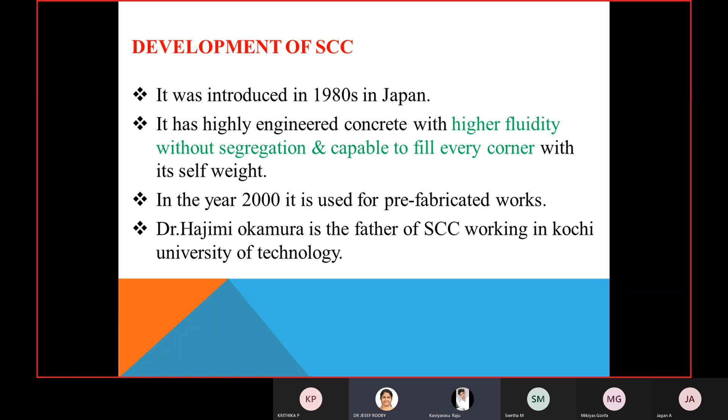Abstract: Self-compacting concrete is a fluid mixture suitable for placing in structures with congested reinforcement without vibration. There is no vibration needed for this concrete, and it has the ability to fill every corner. Self-compacting concrete development must ensure a good balance between deformability and stability.

Introduction: it flows under its own weight and does not require any external vibration for compaction. For normal concrete, we have to compact it or use vibration to settle it down, and this is an advantage for self-compacting concrete - no need to use vibration or compacting material.

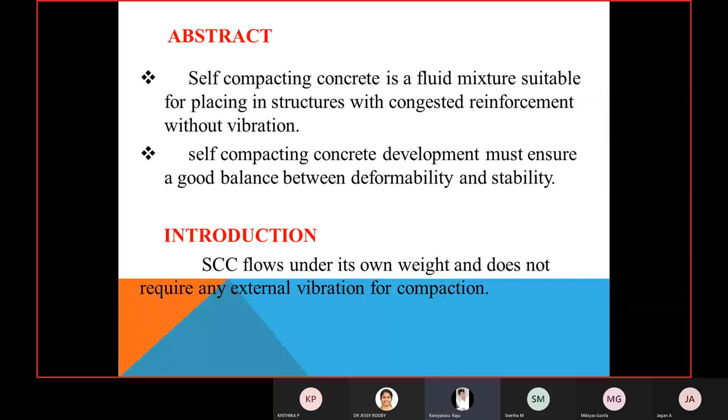What are the materials used? Normally, cement - ordinary Portland cement, grade 43 - was used, along with fly ash. In India, it was obtained from Haryana power plant station. Admixtures used were polycarboxylate ether based superplasticizers complying with ASTM C494 type. These are all the materials used.

Physical properties of cement: the physical properties, results, and IS standard code specification. Fineness, normal consistency, initial setting time, and final setting time were calculated. Compressive strength for 3 days, 7 days, and 28 days was also calculated.

Then properties for fly ash: it is grayish in color and has a specific gravity of 2.13. The average compressive strength after 28 days of mixture is 4.90 megapascal.

Then chemical properties of fly ash: loss of ignition, silica, iron oxide, aluminum, calcium oxide, magnesium oxide, total sulfur, insoluble residue, sodium oxide, potassium oxide. These are the calculations, shown as percent by weight.

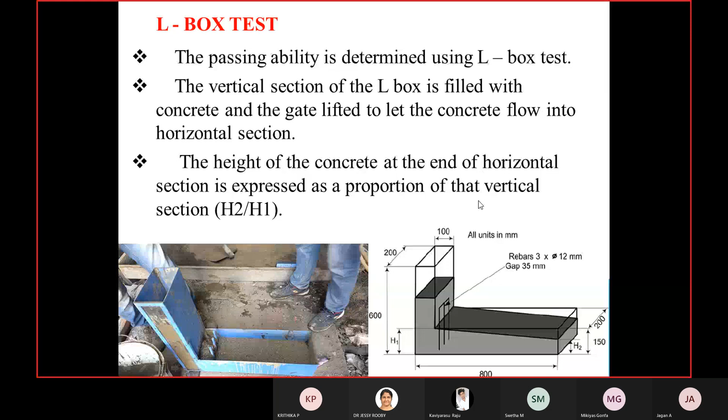Test procedures. Then the L box test. The passing ability is determined by using the L box test. The vertical section of the L box is filled with concrete and the gate lifted to let the concrete flow into the horizontal section. The height of the concrete at the end of the horizontal section is expressed as a proportion of the vertical section, H2 by H1. This is the test procedure.

Workability and compressive strength require more than 5 trial batches. They take 9 trial batches; it requires 9 trial batches. Slump flow, and the time taken for concrete to reach the 500 mm spread circle, and the V funnel and L box tests. How many megapascals for 7 days, 28 days, and 90 days strength attained will be calculated.

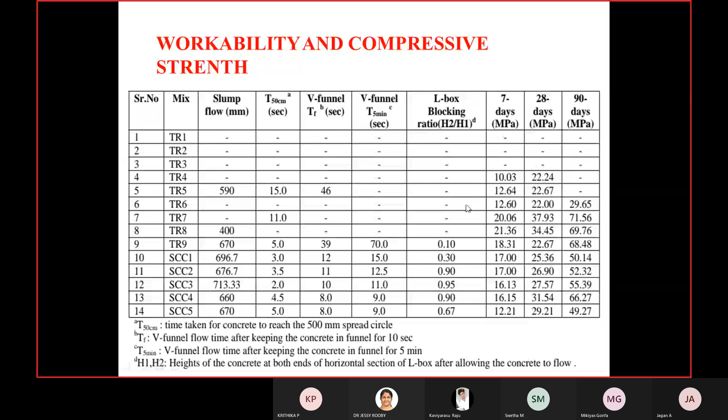Advantages: it is faster construction, improved workability and productivity, freedom in design, cost reduced due to less equipment, reduced noise pollution since vibrators are not used. Typically higher early strength of the concrete is achieved so that formwork removal can be performed more quickly, and reduced construction times, especially for large construction projects.

Disadvantages too: it requires more trial batches, not 1 or 2. It requires more than 5 trial batches. It is costlier than conventional concrete based on materials. There is also a lack of globally accepted standard and mix design.

Conclusion: self-compacting concrete technology can solve time and cost issues, and enhance quality and durability. Since the concrete is capable of self-consolidating and self-compacting, it can easily reach difficult areas and spaces in molds. This factor ultimately yields defect-free, better quality concrete structures.

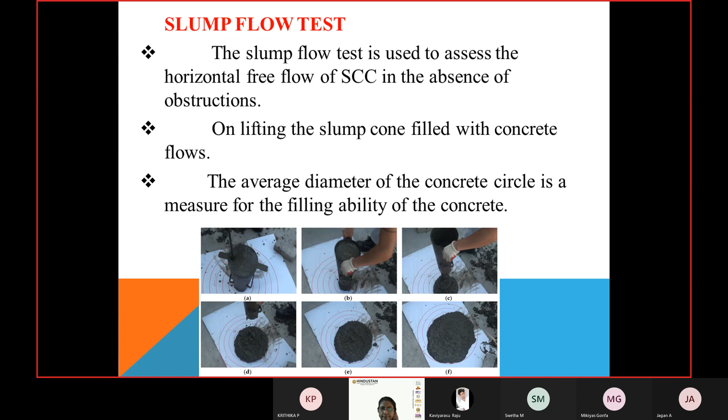Okay, then just move on to that. All these tests, your V funnel, L box, what is the purpose of this test? To calculate how much time it takes. If it reaches more than 6 seconds, it is not recommended to qualify, because it has to fill every corner within the required time.

Is there any standard code for SCC? Standard code, yes ma'am. Which code? One second. IS 383-1970 is the code for fine aggregate and coarse aggregate.

Okay, is there any mix design procedure for self-compacting concrete? IS 383 is for aggregate - fine aggregate, specific gravity, fineness modulus for normal aggregate. Yes. Is there any mix design procedure? Sorry ma'am, mix design - how do you do it for self-compacting concrete?

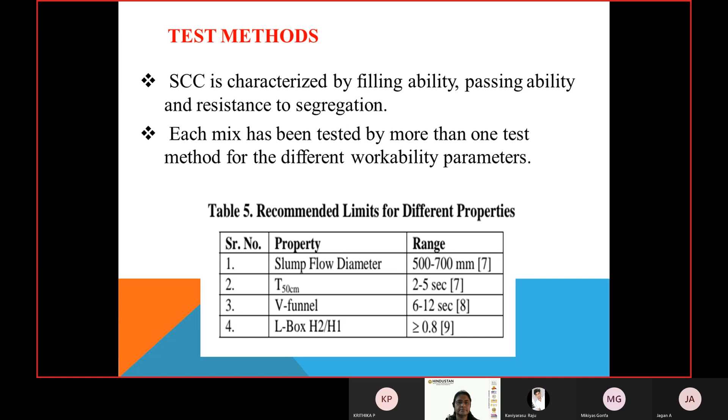Did you tell the application of this? Do you have any slide for the application? Users, no? No ma'am, but it is used for all high-rise structures, because of the flowing property of the concrete, where there is difficulty in compaction, because when there is huge reinforcement detailing, mass detailing is available, there it is not possible to use a vibrator. Okay, so you can go for self-compacting concrete.

That is why the workability is measured initially, with a slump or any other funnel test, or L box or V funnel. We are finding out the workability so that it spreads on its own without any compaction. It should be able to spread in between the reinforcement. So in such situations where there is heavy reinforcement, where the vibrator cannot be used, self-compacting concrete can be adopted or it can be used.

Okay, so here you have seen the material that you have used. For the self-compacting concrete, the coarse aggregate that you are using, we cannot have a bigger aggregate like 30, 40 mm, more than 20 mm. 20 mm itself is difficult. It should be less than 16 to 12 mm gradation of aggregate required, because if you have a bigger aggregate, you need compaction, it will not flow on its own. So the aggregate size plays a big role in self-compacting concrete mix design and preparation.

Where did you see that? Did you see it somewhere? Yes, I'm searching on the web. Yeah, it says self-compacting concrete procedure for design. It's actually an abstract from the paper. Okay, but do you think that if you increase the water cement ratio, what about the strength? Whether the strength will be affected, isn't it? Can you tell me, even Kaviyarasu, can you show me that mix design initially?

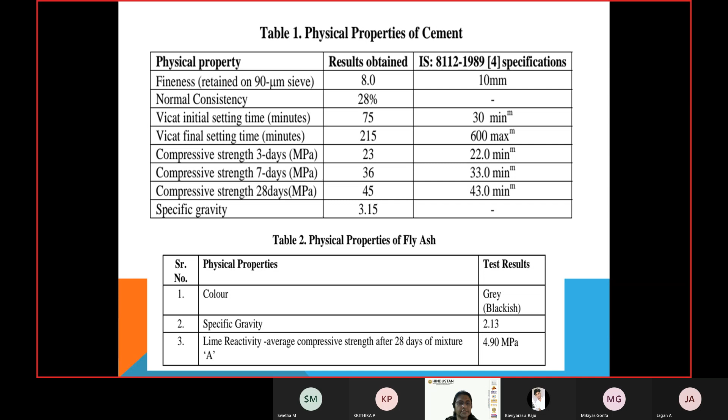Show me the initial slide. Before that, okay, properties, materials used. Show me. What is the next one? Next slide. Next. No, I think previous. Somewhere I have seen some admixtures. Where is it? Previous. Say, what is this? Materials used. Okay, can you see some admixtures here? Admixture.

Okay, so here, by increasing the water cement ratio, you cannot increase the workability. You can increase the workability, but that will affect the strength. That will affect the strength. So in self-compacting concrete, actually what you are doing is using some admixtures. Admixtures, in the sense, to increase the workability. You use some superplasticizer. You can see some superplasticizer mentioned here - a polycarboxylic ether-based superplasticizer complying with all these things was used.

So this is for a particular paper he is presenting. But in self-compacting concrete, as you say, the water cement ratio cannot be increased more than a particular value, because if you increase the water cement ratio, the strength will be affected. The strength will drastically reduce. So water cement ratio should always be minimum in order to have high strength. That is for normal concrete itself. But in self-compacting concrete, when you achieve the workability by putting some additional admixtures, okay, that is called superplasticizer, or even fly ash. Even if you use fly ash, it also increases the workability.

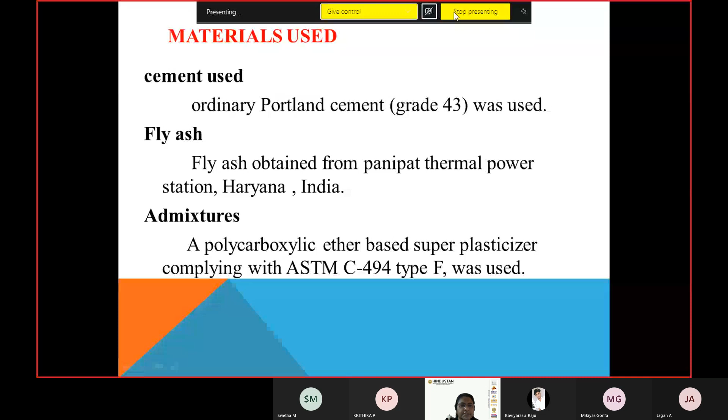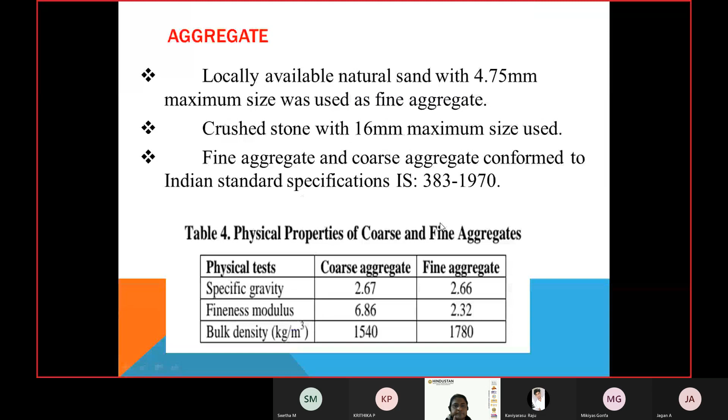Okay, you come towards the end of the slide. What are the advantages, disadvantages you have mentioned? Yes ma'am, so it says faster construction, improved workability and productivity, freedom in design, cost is reduced due to

using less equipment. Why the cost reduces? Because cost reduction is possible. How is the cost reduction possible? Vibrators are not used, please. So vibration cost is reduced.

Then, typically higher early strength of the concrete is achieved so that formwork removal can be performed more quickly, because when we are using self-compacting concrete, you use some additional admixtures, quick setting ones. You will be using some quick setting cement and early strength achieving admixtures in self-compacting concrete. Once the early strength is achieved, we can remove the formwork.

So the time can be saved. So all such advantages are there for reduced construction time, especially at larger construction sites. Okay, then any other disadvantage?

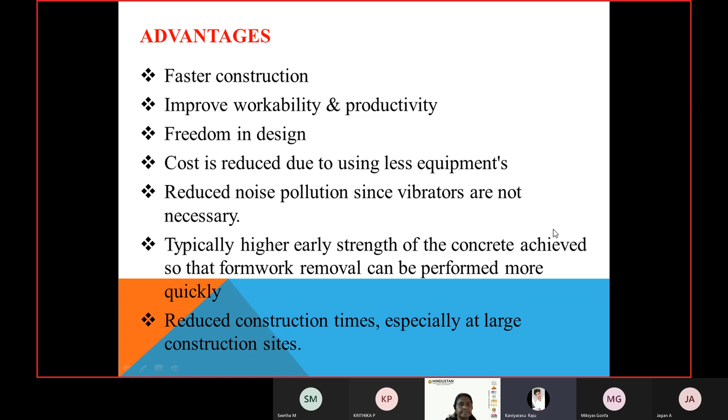More trial batches. More trial batches. What is that? You didn't put any disadvantages here? Okay, change it. It requires more trial batches, costlier than conventional concrete based on materials, lack of globally accepted test standards

and mix design. See, this is what I asked you initially. Is there any standard mix design for self-compacting concrete? So till now, I think for SCC, there is no codal provision that has come, no standard codal provision.

So it is by trial and error we are doing everything. We have to first fix the workability, that is more important, and the strength. So these two parameters have to be achieved initially. That is what requires more trial batches. It is costlier than conventional concrete because you are using more admixtures in this.

All the admixtures are costly, except the fly ash and other waste products. All other superplasticizers are all costly. So all these things, because we are adding them, it is a little costlier than conventional concrete. And that is why it is not globally accepted, because there is no standard mix design procedure.

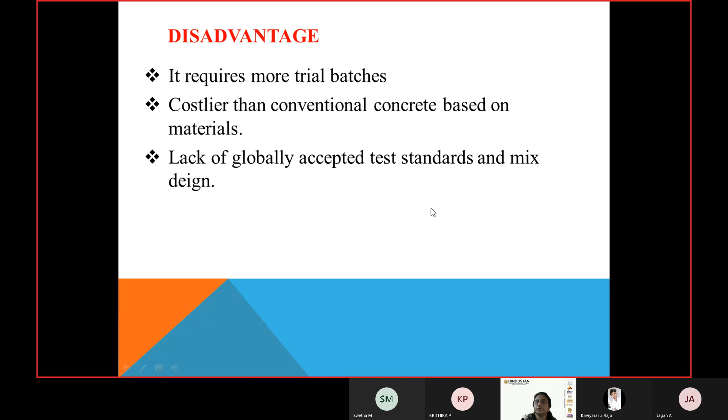Okay, so good, if there is no other clarification, we can stop this. Okay, you have some examples, show me, this is what I wanted.

Okay, anything else? Any other slide? That's the conclusion, okay.

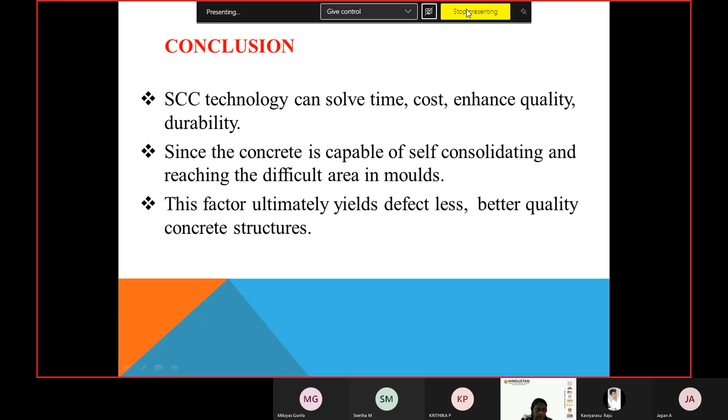Next is lightweight concrete. Who did I assign for lightweight concrete? Ma'am, me. Lightweight concrete is Krithika. Okay.

Krithika, I think next Friday... today is the 18th, next Friday is Christmas Day, isn't it? The 25th. Yes ma'am, so the 25th will be a holiday for you. So next Friday we will not have any class. So you can have it another day. Is that okay? Okay ma'am.

The week after next week you can present this lightweight concrete topic, and others should also prepare now. Swetha, Mikiyas, you can also select one topic of any material, and tell me the topic so you can have a presentation.

It is better if you can use the material that is usually used in your country. Do you have any high-rise structures in your country? Not really, not much. Okay, anyway, whatever according to your knowledge and your country's codal provisions, you can present the construction aspects of the buildings in your country.